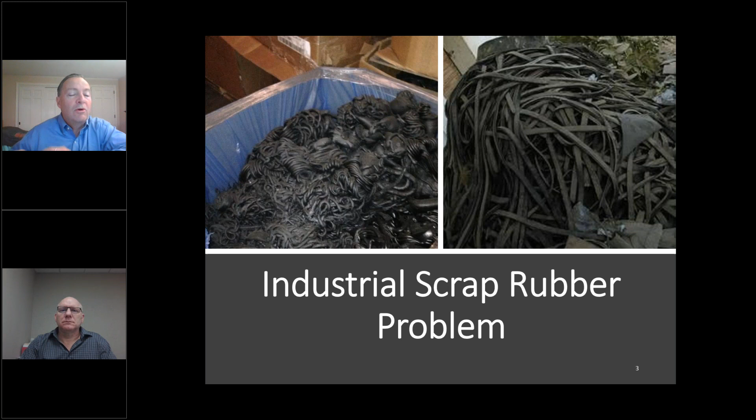We're excited to come and speak to you about North Shore Rubber and discuss a little bit more about a topic that has been very much in the news: sustainability in the rubber industry. As you all know, globally we have a lot of scrap tires, and the industry has done a pretty good job of making sure that scrap tires don't necessarily end up in landfills. But similarly, in the non-tire rubber industry, we also have a scrap rubber problem, and the industry is still working on how to properly avoid those materials from going into landfills, or properly reutilize them, recycle them.

The challenge that is in front of us is that when you look at scrap rubber, a lot of the scrap rubber ends up being used as a tire-derived fuel, as you can see on the little pyramid on the upper right-hand corner. Tire-derived fuel for cement kilns. Some of it goes into crumb production or micronizing. Those materials end up being utilized as a filler replacement at a fairly low percentage, which makes it a little bit more challenging to integrate those materials at a significant quantity.

And at the top end of the pyramid is really the devulcanization of materials, and devulcanization has been an effort that has been tried ever since vulcanization of rubber came into existence. The challenge with devulcanization and all the previous technologies is that oftentimes it's a low percentage devulcanization, or uses chemicals or solvents, or has loss of material, or is simply not scalable or commercially viable. You may be able to do it, but you're spending way more money than you are for virgin material. And as a result, it's just very difficult to justify the technical resources required to integrate this material into virgin compound materials.

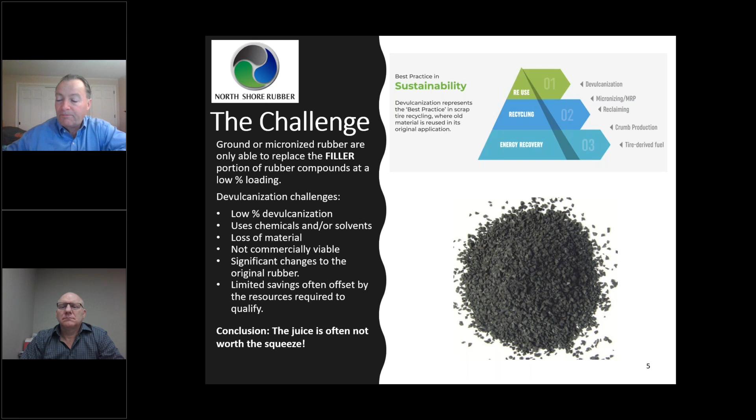What is rubber devulcanization? I'm going to hand the baton to Mr. Ted Nelson, who is our technical expert, who's going to explain that briefly. Okay, so essentially most rubber is cured with sulfur, and so you get some kind of sulfur bond that forms the cross links or the bridges from one polymer chain to another chain. That gives the rubber that solid nature, and it also provides the wonderful properties that rubber has. So when you want to devulcanize, you actually want to preferentially break the sulfur bonds, sulfur carbon bonds, rather than the backbone of the polymer.

Because when you break the backbone, essentially you're shortening the polymer chain, and you're going to reduce the capability of the rubber in anything you use it in after that. But with devulcanization, you break those cross links, and if you can devulcanize significantly, now you have a material that's essentially reusable. Much like when you melt plastics and can reform it, now you have something that you can remix into rubber compounds, and you can derive very good usable properties out of it by revulcanizing it with additional sulfur and accelerator. So that's essentially devulcanization. Thank you, Ted.

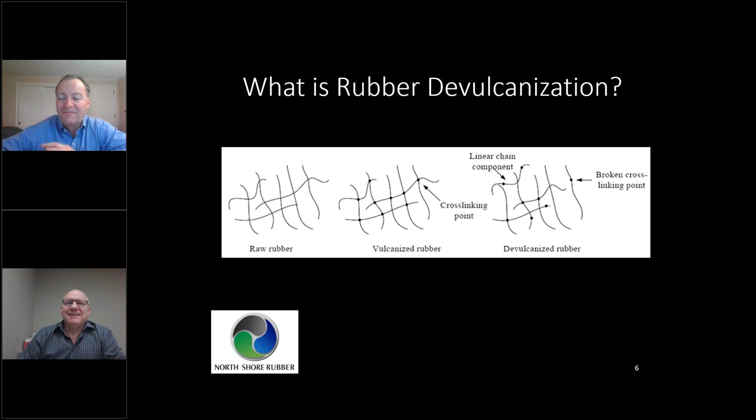So the solution that has been developed is our proprietary technology, and our proprietary technology, as a way of introduction, was developed up in Canada at the University of Waterloo by Professor Tzoganakis, and then was spun off into a separate company called Tyromer, and Tyromer is our technology partner up in Canada. North Shore Rubber is the exclusive licensee of the technology for the US and Mexico.

Our technology results in material that can be used as a replacement of the polymer portion of the original formula. And that is important because all of the other previous technologies that have been in this space oftentimes ended up just being a filler replacement at the end of the day at a very low percentage. Our material can be introduced at a significantly high rate.

High loading: we generally start our projects at 20%. Sometimes we have to back off a little bit, and oftentimes we can go significantly higher to the 45% range, and we have one customer who is using our material in the 100% range, and just adds curatives to our material and is making products from that.

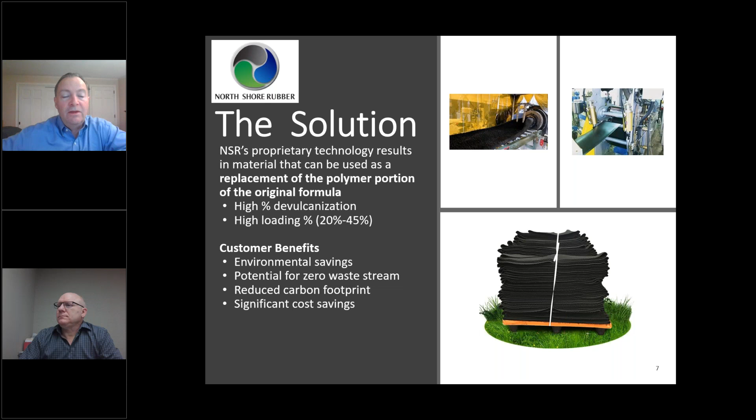The benefit of this material is that the customer is able to achieve significant environmental savings because they're able to get to a zero waste stream. They're able to reduce their carbon footprint because the material has significantly less carbon emission versus original materials. And most importantly, we're able to achieve significant cost savings because the technology and the material that's resulting from it is significantly less than virgin material in the process.

What's unique about the technology Tyromer has developed is that this technology is already commercially proven. Millions of pounds have already been produced. Up in Canada, Kal Tire, who's a major OTR tire producer, has made over 10,000 tires, retread tires, utilizing this technology. It achieves a high percentage devulcanization. Ted, maybe you can chime in on the devulcanization aspect.

Yeah, once you devulcanize, you measure using a swell method, and this material is shown to be well in the 90s, 94, 95 or above for actually breaking the crosslink. So you have opened up that much opportunity for reintegration and revulcanization of the product.

And I guess I'll just finish this. This process uses no chemicals whatsoever. It's a thermomechanical process. It's very high conversion output. You essentially lose pretty much nothing going through the process, and it uses a little bit of supercritical carbon dioxide to aid the process in devulcanizing, or breaking the sulfur bonds. So it has very minimal impact on properties because, again, you're not breaking the backbone. You're just selectively breaking the crosslinks of sulfur. So, go on, you go.

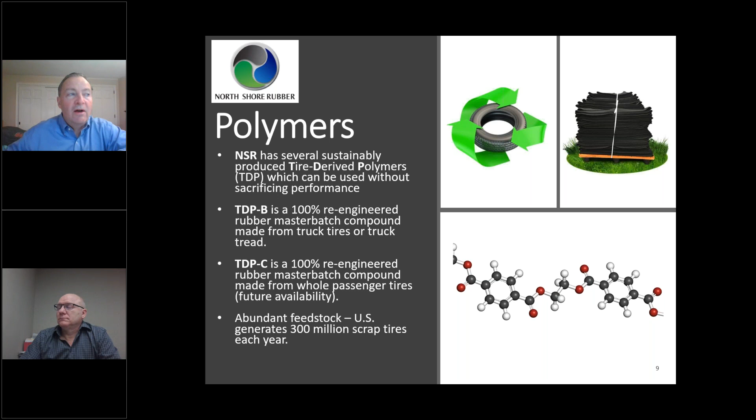While obviously this type of material can easily go back into tires because that's where it's coming from, we've already done a number of case studies, including a presentation at the 2020 International Elastomer Conference, whereby we showed and proved that our material can be introduced into a number of other applications and polymer families. And Ted, maybe you can share a little bit more about that.

Yeah, I've been working with North Shore for about the last 5 years, and I've done a lot of work in the lab and then taken them to factory for them. And when you look at both the TDP-B and the TDP-C, the truck tire and the passenger tire, I've had very good success in not just the tread compounds for retreading, but conveyor belting is a very good use of this material because, again, it's got a lot of that SBR content.

And we've been able to achieve properties that meet all of your RMA standards, your grade 2 conveyor belting. We've seen equivalent heat aging properties. We've seen equivalent compression set properties, abrasion properties, tear properties. In some cases, tear actually increases.

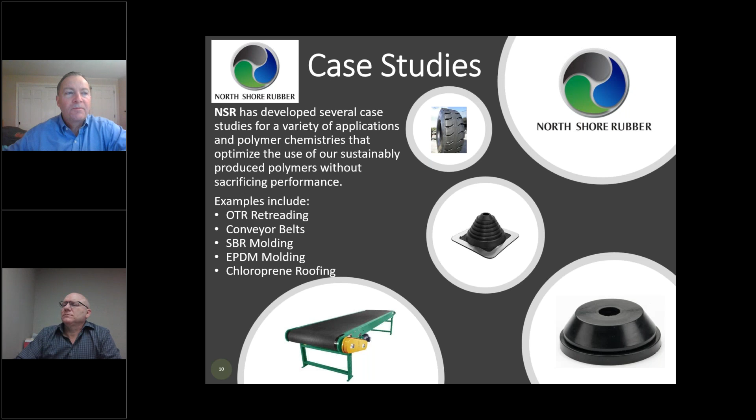The other option that our customers have is our closed loop management service. A lot of our customers have significant scrap, and right now don't have a good outlet for utilizing that scrap, and oftentimes it goes into a landfill. What we can do, through our partner network, is have that material picked up, brought back to our facility, processed and put through the devulcanization process, so that we can then offer it back to them or their designated custom mixer to reintegrate into their own formulations.

The benefit there, of course, is that they know exactly what the material is, and can very finely define the integration rates and the processing, and it has a lot of customizable options for that. And of course, then you're eliminating a complete waste stream. You're also reducing your raw material cost. You're enhancing your sustainability and your quality, and you're reducing your CO2 emissions. So it's a true closed loop system that works very, very well.

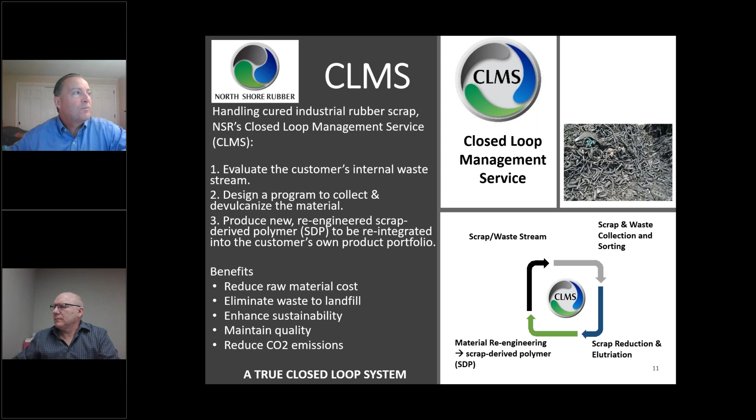It provides significant sustainability options for our customers, and the closed loop manufacturing management option gives you the ability to go to a zero waste stream and reduce your carbon footprint. So lots of benefits for our customers in making this part of your loop.

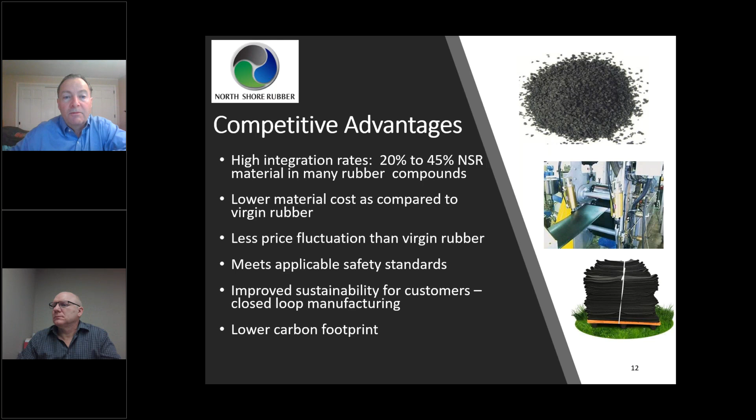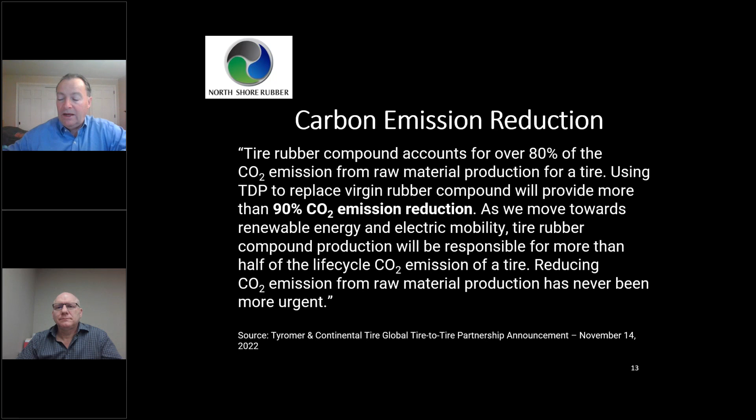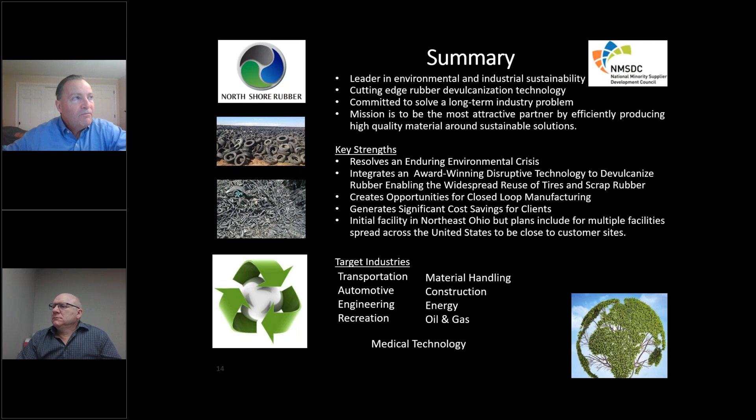That is the end of our presentation.